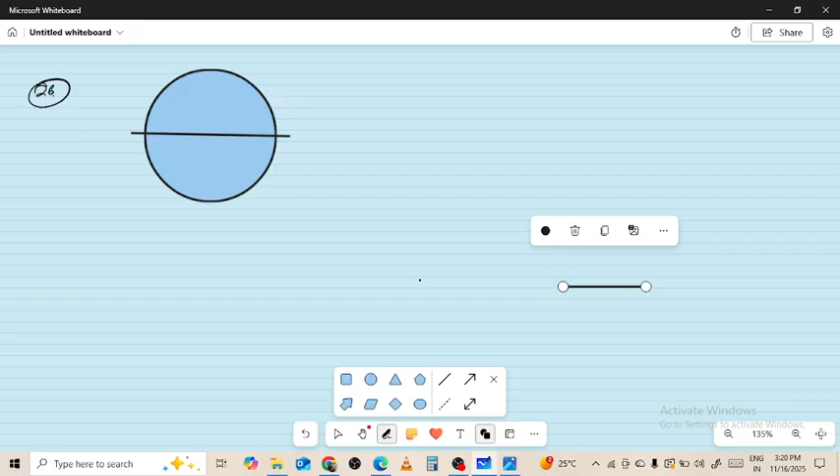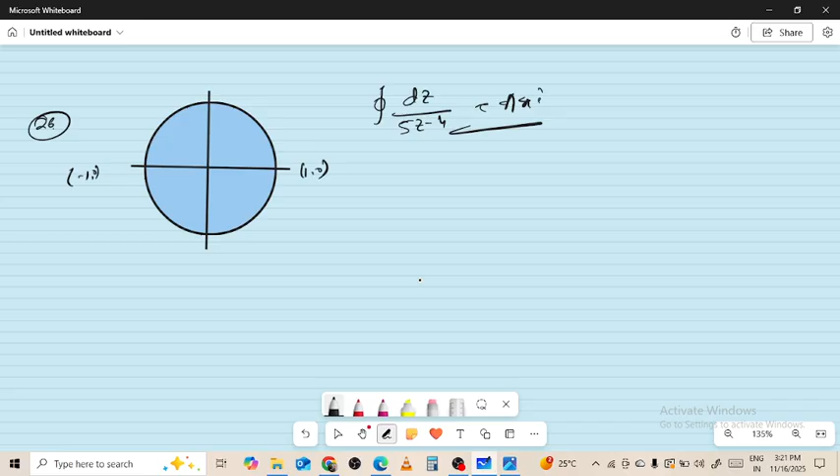Here we would draw the body over here. Now the equation is cyclic integral dz by (5z minus 4) is equal to a times of pi i. The points are minus 1, 0 and 1, 0. Therefore for the y direction, minus 1, 0 and minus 1, 0, 1, 0, 0, 1, sorry.

So we have to proceed: 1 upon 5 cyclic integral over C, 1 upon (z minus 4 upon 5). Therefore the pole is z is equal to 4 upon 5.

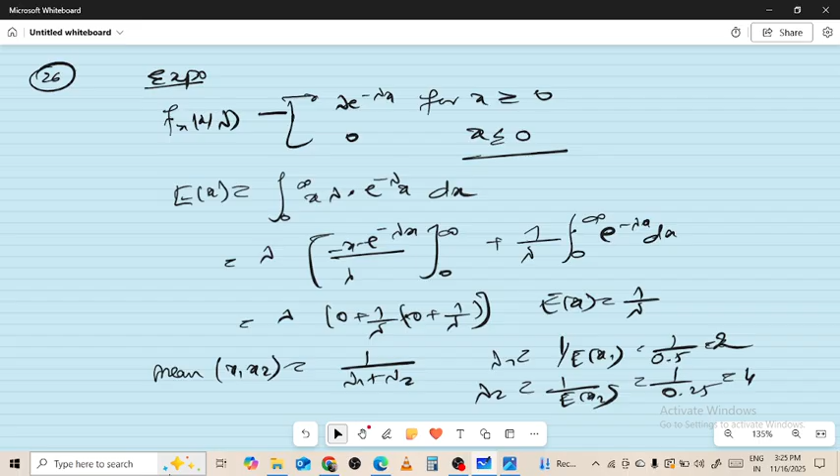Okay, now further, mean of minimum value honi chahiye x1, x2, toh 2 plus 4, 1 upon 0.25 is equal to 4, right. Toh yahan jo aapka justify hoga: exponentially distributed with mean of 1 upon 6.

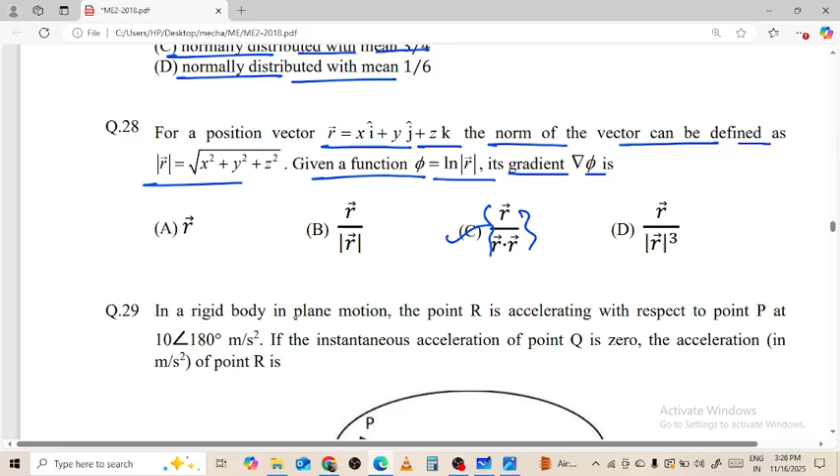Now 29th one. Kya bol raha hai: in a rigid body in a plane motion, point r is accelerating with respect to point p at angle of 180 degree, 10 meter per second square. If the instantaneous acceleration of point q is 0, acceleration in meter per second square for the point r is to be 16, 12, 20 diya hua hai, x, y, z diya hua hai. On that contrary note, how do we have to fetch that gap?

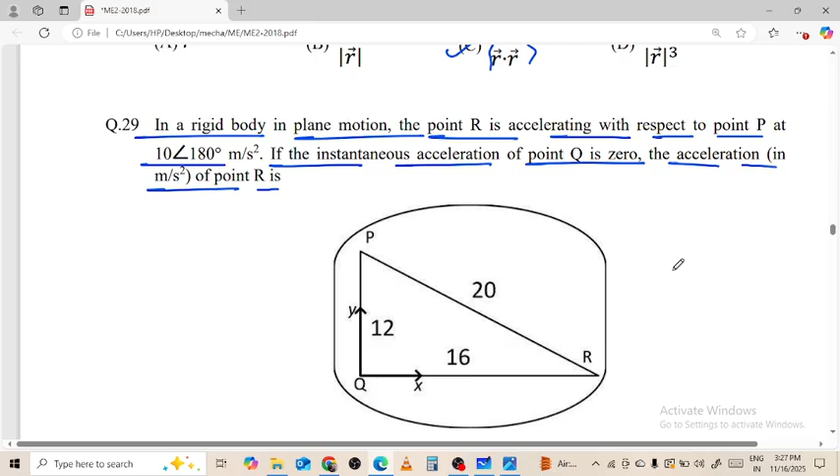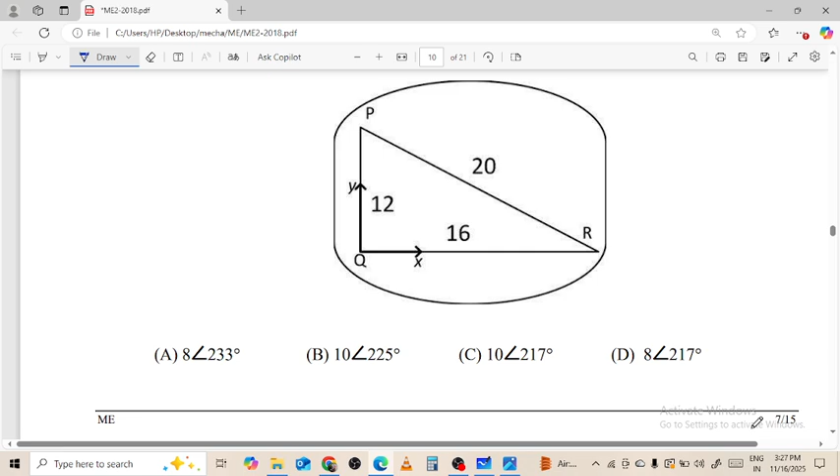Chaliye dekhte hain. So here we have to move around on this node 1. Options are 233, 225, 217, ya ki phir 217 at 8 angle.

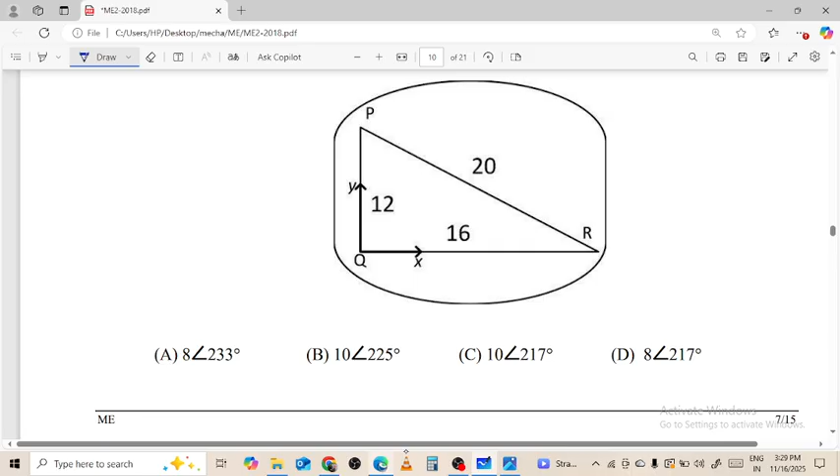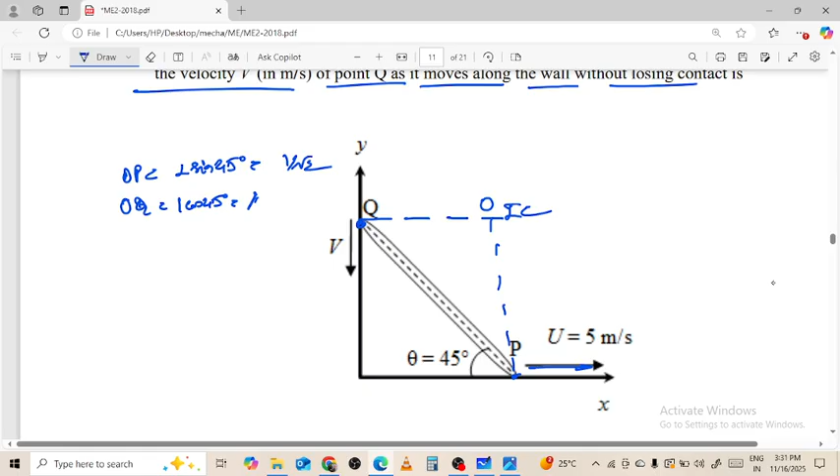1 upon square root of 2, OP times of omega, P into omega. So 5 is equal to 1 upon root 2 times omega value, and OQ is equal to OQ multiplied with omega, 1 upon square root of 2 omega.

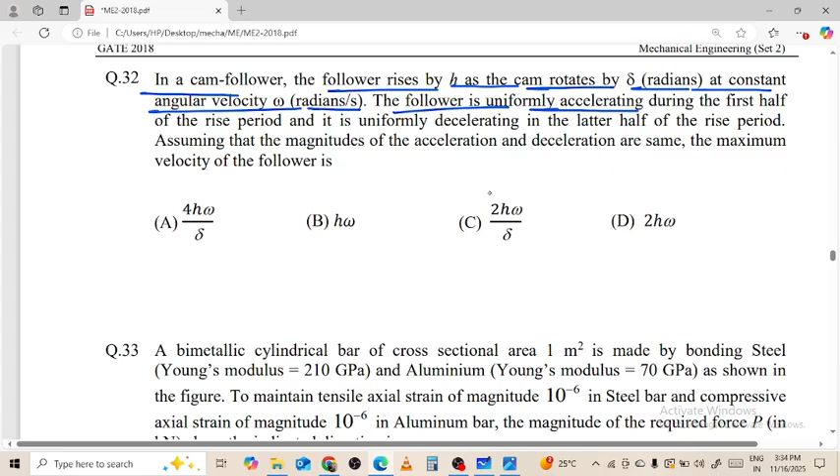Now, next question we have: in a cam and follower, the follower rises by h as the cam rotates by delta radian at constant angular velocity omega radian per second. The follower is uniformly accelerating during the first half of the rise period, and uniformly decelerating in the latter half of the rise period.

Assuming that the magnitudes of the acceleration and deceleration are same, the maximum velocity of the follower options are 4h omega by delta, h omega, 2h omega by delta, and 2h omega.

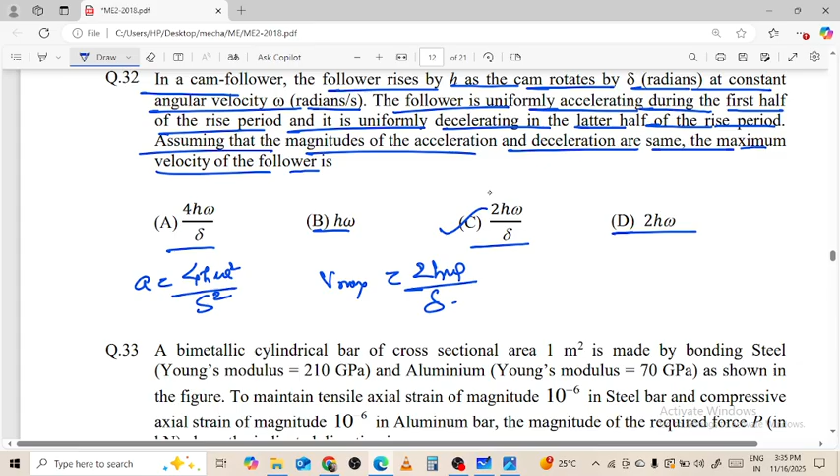Next question. A bimetallic cylindrical bar of cross-sectional area 1 meter square is to be made by bonding steel, Young's modulus 210 gigapascal, and aluminium, Young's modulus 70 gigapascal, as shown in the figure. For a tensile axial strain of magnitude 10 raised to power minus 6 in the steel bar and compressive axial strain of magnitude 10 raised to power minus 6 in the aluminium bar, the magnitude of the required force P in kilonewton along the indicated direction is to be found, with L by 2.

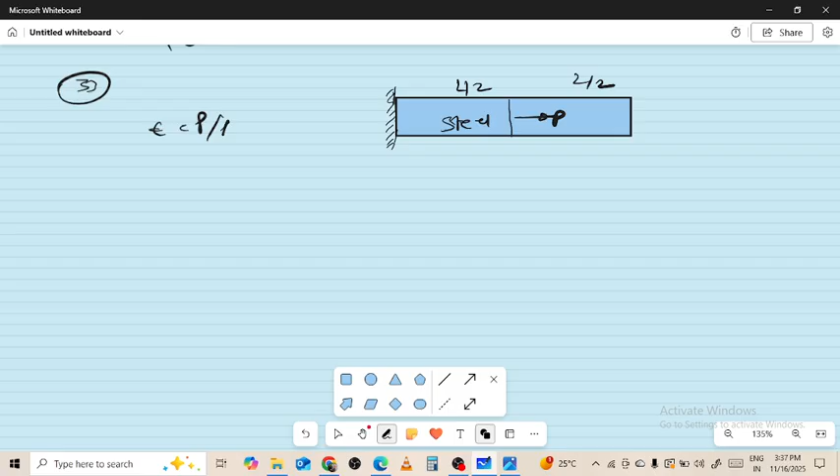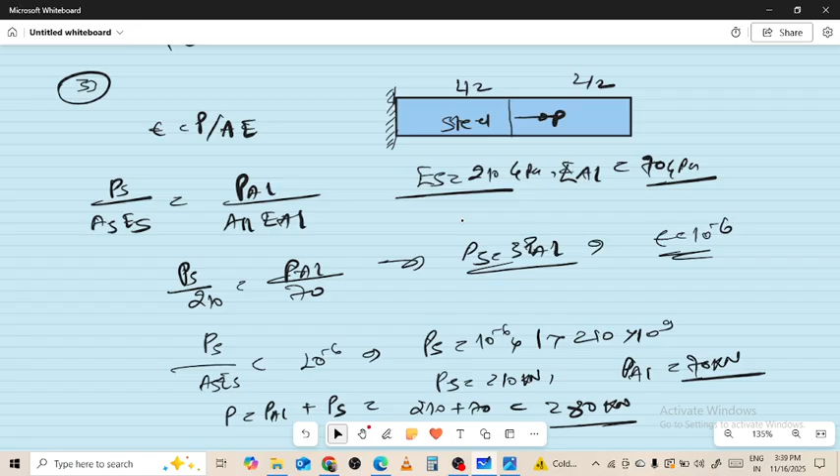Is your right choice for that. Now we have the next question.

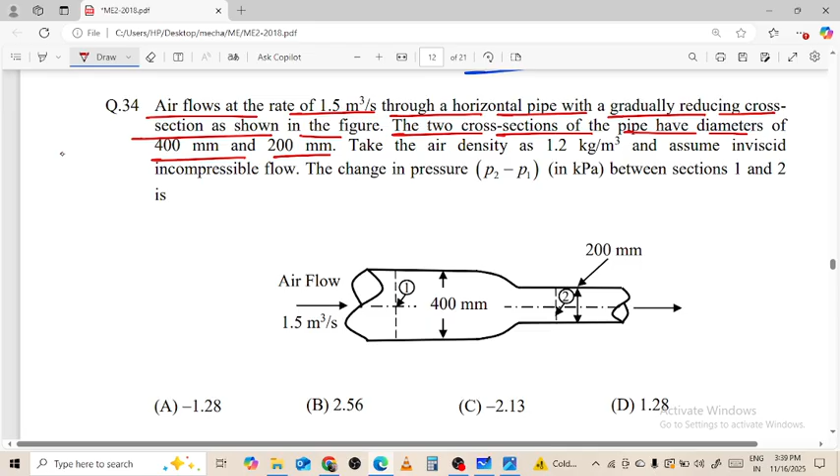Air flows at a rate of 1.5 meter cube per second through a horizontal pipe with gradually reducing cross section as shown in figure. The two cross sections of the pipe have diameters of 400 and 200 millimeter. Take the air density as 1.2 kilogram per meter cube, assuming inviscid incompressible flow. Find the change of pressure P2 minus P1 in kilopascal between section 1 and 2.

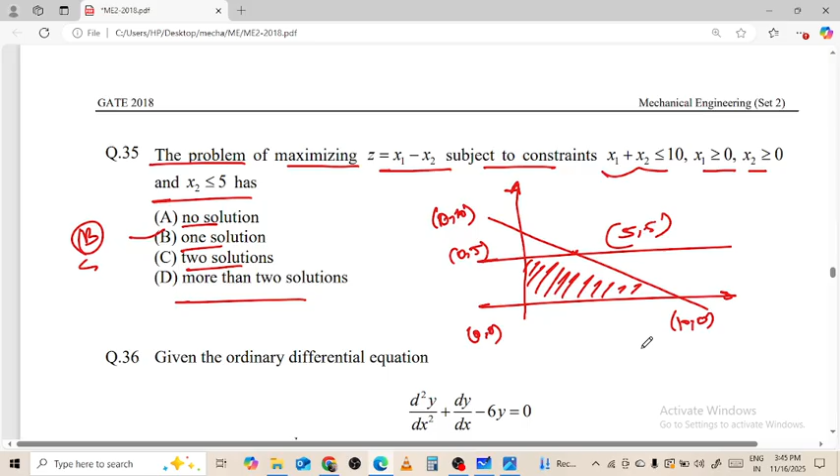Here it is asked, given the ordinary differential equation d square y by dx square plus dy by dx minus 6y equal to 0, with y equal to 0 and dy by dx equal to 1 at x equal to 0. The value of y at 1, correct up to a decimal, is asked.

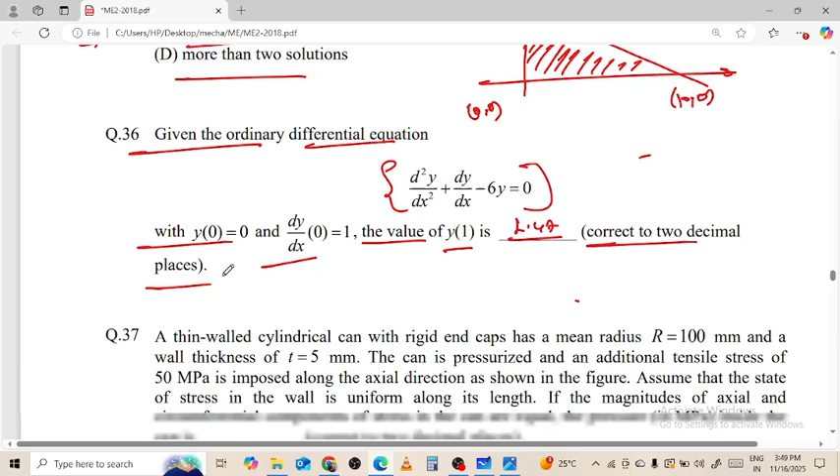A thin walled cylindrical can with rigid end caps has a mean radius of 100 millimeter and a wall thickness of 5 millimeter. The can is pressurized and an additional tensile stress of 50 megapascal is imposed along the axial direction shown in the figure. Assume the state of stress in the wall is uniform along its length. The magnitudes of axial and circumferential components of stress in the can are equal. Find the pressure inside the can, correct up to 2 decimal places.

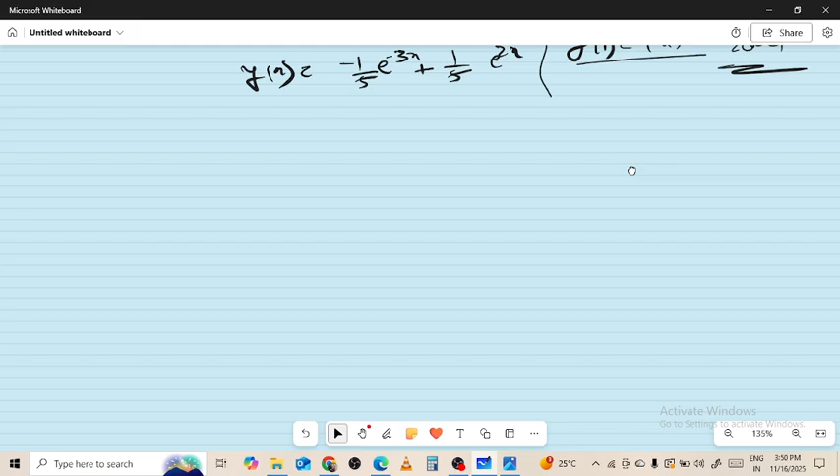In a cylindrical body, hoop stress is PD by 2 times thickness, in terms of radius PR by T, and the longitudinal stress is equal to PD by 4T, equal to PR by 2T.

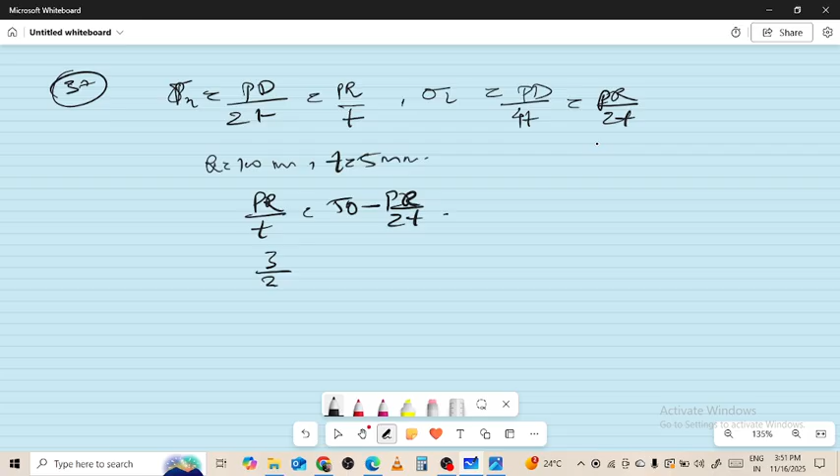Right, we have the radius of 100 millimeter and thickness 5. PR by 2T plus 50 equals PR by T, so PR by 2T value is 50. So the value of pressure, 5 megapascal, is to be achieved. Absolutely correct option.

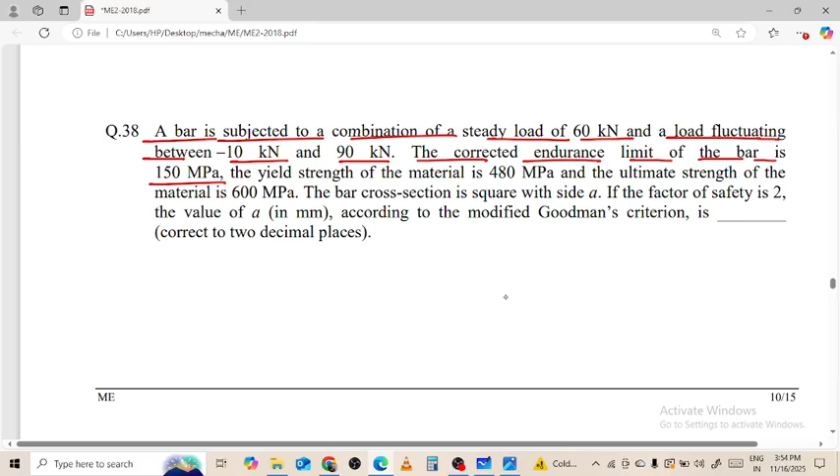Next question: a bar is subjected to a combination of a steady load of 60 kilonewton and a load fluctuating between -10 kilonewton and 90 kilonewton. The corrected endurance limit of the bar is 150 megapascal. Yield strength of the material is 480 megapascal and the ultimate strength is 600 megapascal. The bar cross section is square with side A. Factor of safety is 2. Find the value of A according to the modified Goodman criteria.

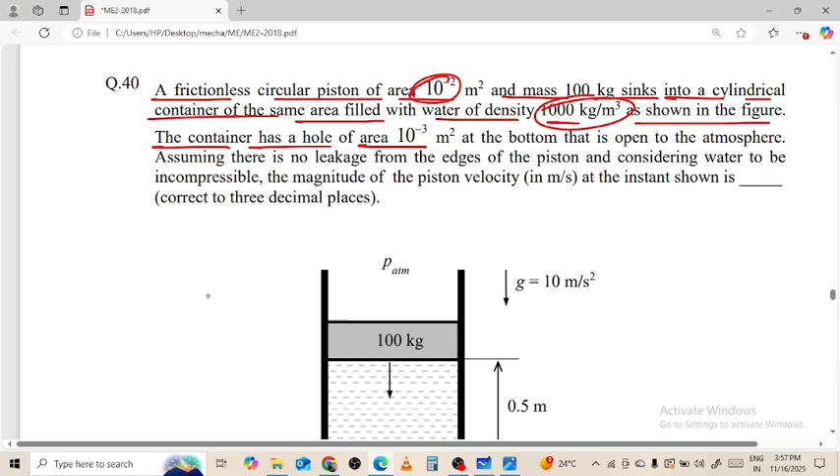Next we come to question 40th: a frictionless circular piston of area 10^-2 meter square and mass 100 kg sinks into a cylindrical container of the same area filled with water of density 1000 kg per meter cube, as shown in the figure. The container has a hole of 10^-3 meter square at the bottom that is open to the atmosphere. Assuming there is no leakage from the edges of the piston and considering water to be incompressible, find the magnitude of piston velocity at the instant shown.

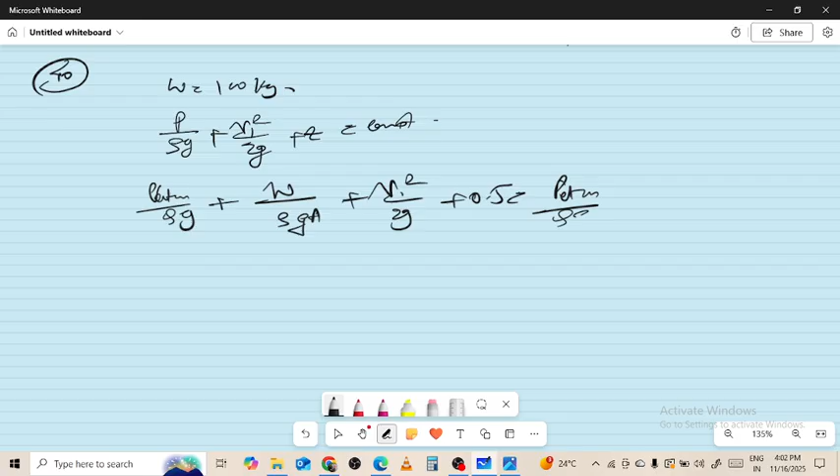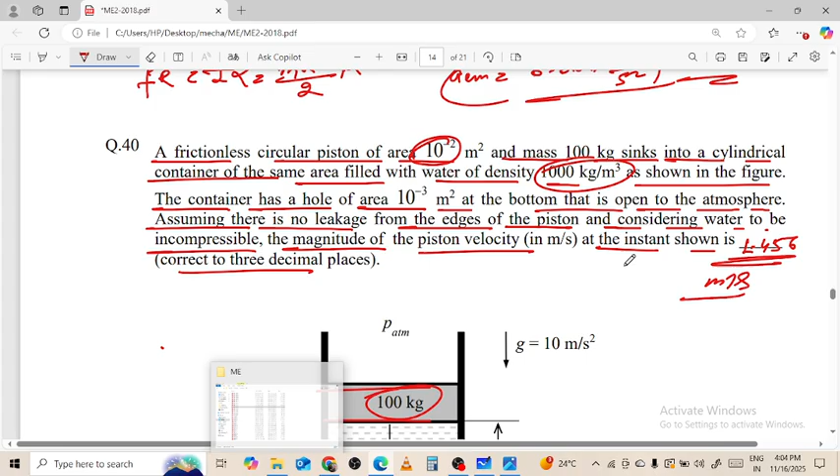So the final value is to be v1 is equal to 1.456 meters per second. That is your final answer. 1.456. Next question we have on the screen here.

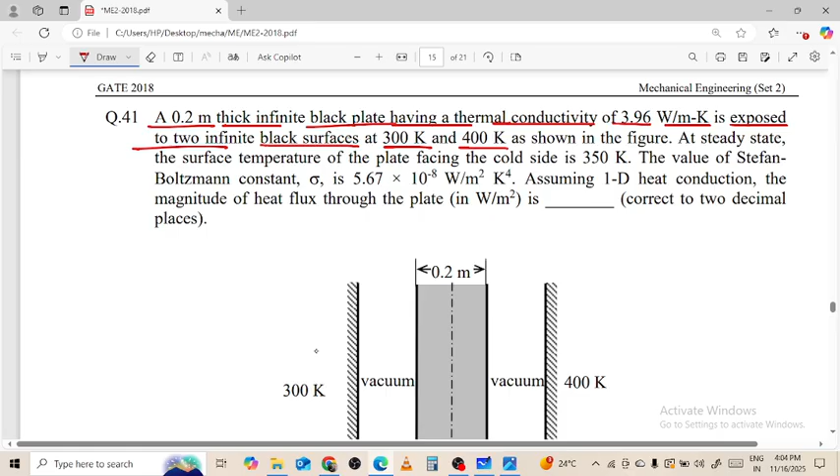A 0.2 meter thick infinite black plate having a thermal conductivity of 3.96 watt per meter Kelvin is exposed to two infinite black surfaces, 300 and 400 Kelvin, shown in the figure. Steady state. Surface temperature of the plate facing the cold side is 350 Kelvin. Value of Stefan Boltzmann constant sigma 5.67 into 10 raised to power minus 8 watt per meter square Kelvin to the power 4. Assuming one-dimensional heat conduction, the magnitude of heat flux through the plate in watt per meter square.

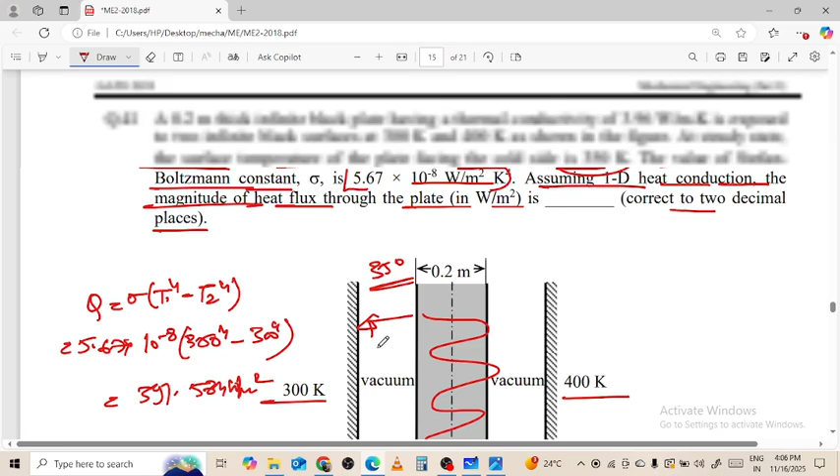So the magnitude, 391.58, final answer.

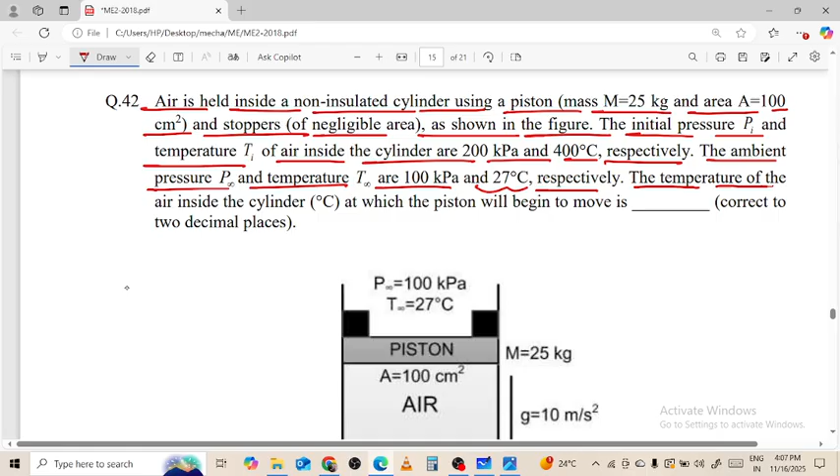Next question. Air is held inside a non-insulated cylinder using a piston. Mass 25 kg. Area 100 centimeter square. Stopper of negligible area shown in the figure. Initial pressure Pi, temperature Ti of air inside the cylinder are 200 kilopascal and 400 degrees Celsius respectively. Ambient pressure P infinity and temperature T infinity are 100 kilopascal and 27 degrees Celsius respectively. Temperature of air inside the cylinder in degrees Celsius at which piston will begin to move. Correct up to 2 decimal.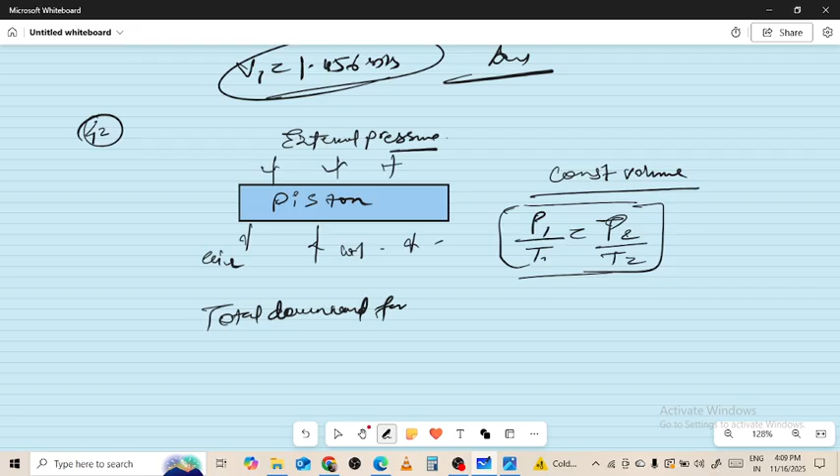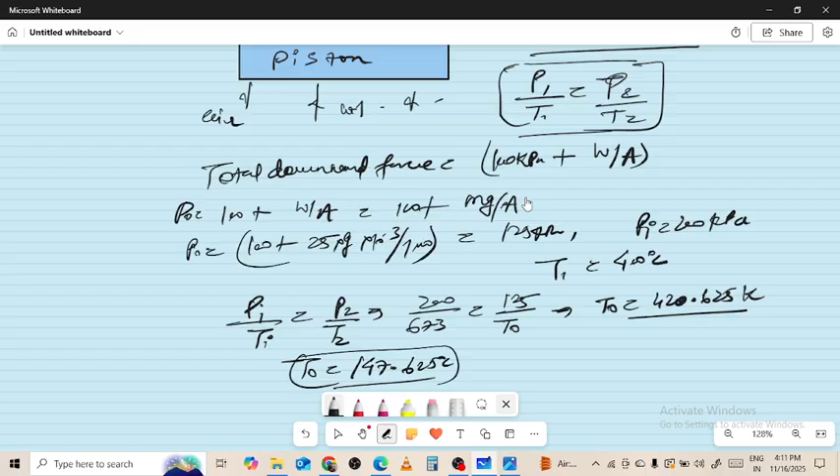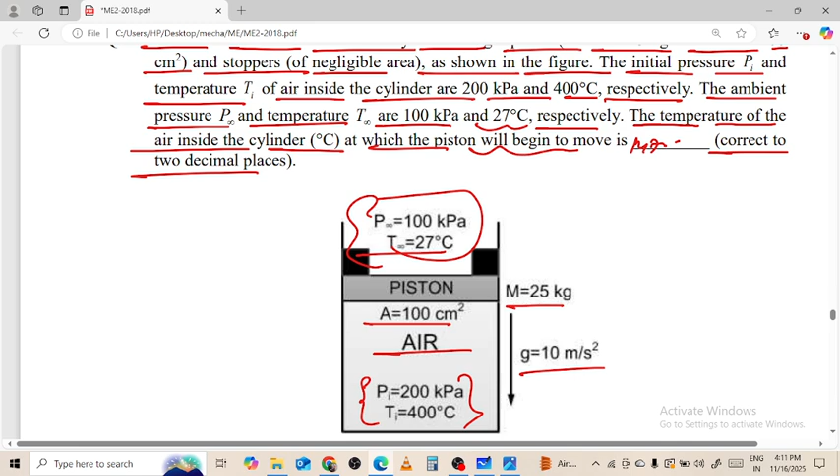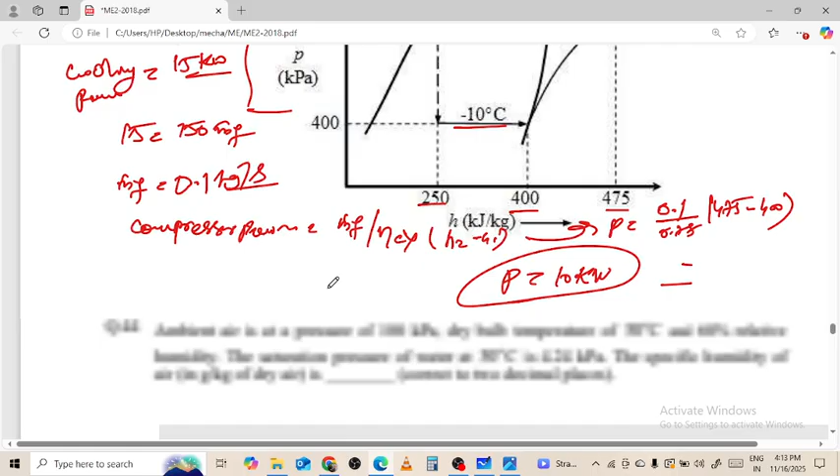Now 44th: ambient air is at pressure 100 kilopascal, DBT 30 degrees, 60% relative humidity, saturation pressure of water at 30 degrees Celsius.

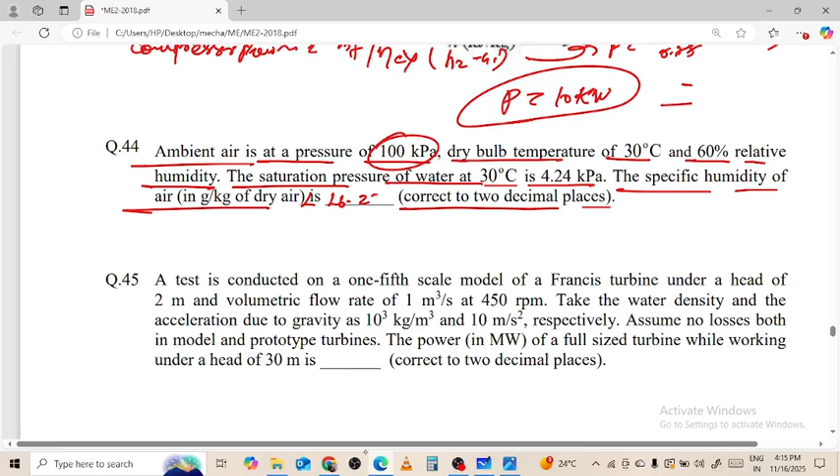Here the question number 45. A test is conducted on a 1/5 scale model of a turbine under a head of 2 meter, volumetric flow rate 1 meter cube per second at 450 rpm. Take the water density and the acceleration due to gravity as 1000 kg per meter cube and 10 meter per second square respectively. No losses both in model and prototype turbine. Power of full size turbine while working under a head of 30 meter, to 2 decimal places,

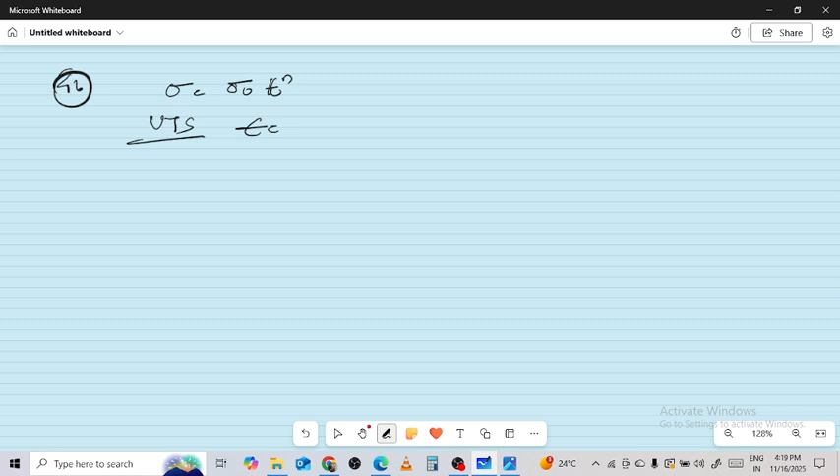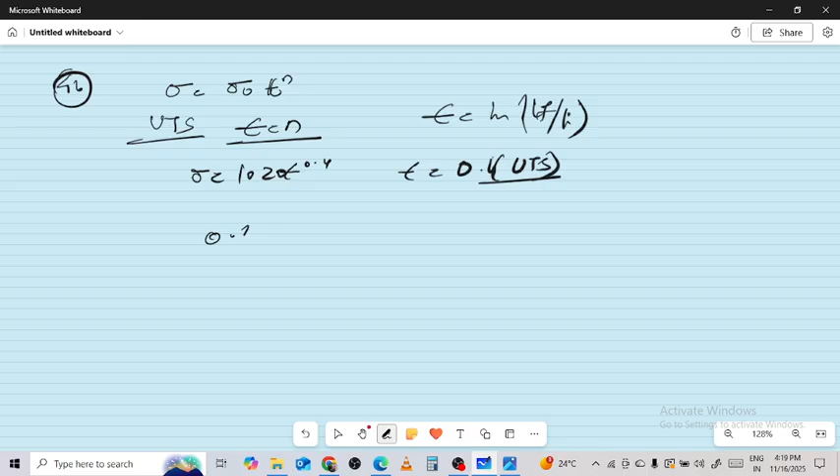Epsilon power n, the UTS. Epsilon is n, epsilon is log of final length to the initial length. Final value is 1.491 and the volume remains constant.

So the volume initially is equal to final. So the AF value is equal to 100 into Li by Lf. Here the AF value is equal to 100 by 1.491. So the AF is 67.05.

Next, 47: a steel wire is drawn from an initial diameter of 10 millimeter to a final diameter of 7.5 millimeter, half cone angle of the die, coefficient of friction between die and the wire 0.1, average of initial and final yield stress 350 megapascal, equation of drawing stress sigma given as Y average, 1 plus mu cot alpha, 1 minus Df by Di to the power 2 mu cot alpha. Drawing stress required to carry out the operation in decimal places is to be asked.

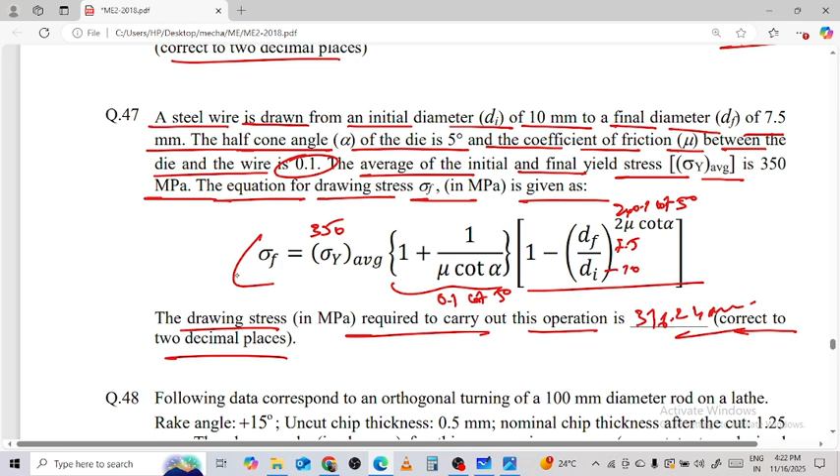Next question 48: following data correspond to an orthogonal turning of 100 millimeter diameter rod on lathe, rake angle 15 degree, uncut chip thickness 0.5 millimeter, nominal chip thickness after the cut 1.25 mm. Shear angle for this process in decimal places is to be asked.

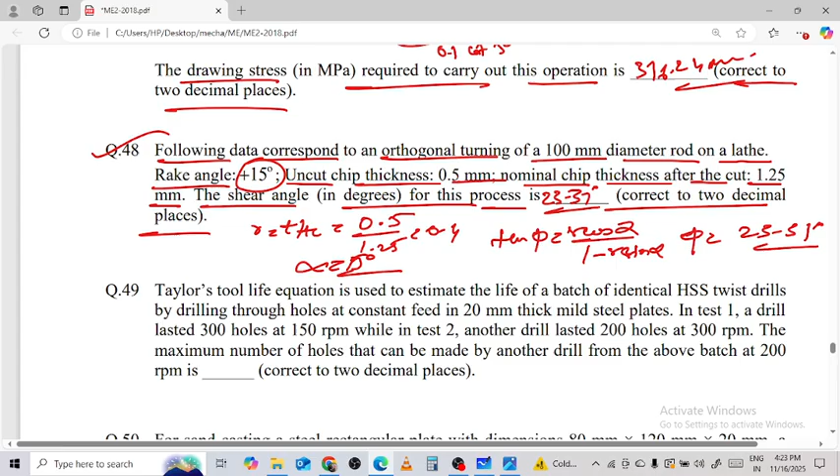Next, 49th number: Taylor's tool life equation is used to estimate the life of a batch of identical high speed steel twist drills by drilling through holes at constant feed in a 20 millimeter thick mild steel plate. In test 1 a drill lasted 300 holes at 150 rpm while in test 2 another drill lasted 200 at 300 rpm. Maximum number of holes that can be made by another drill from the above batch is

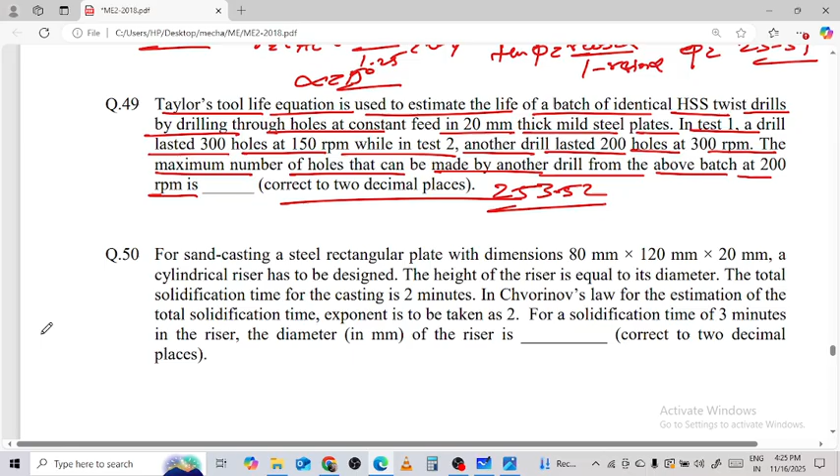For a sand casting of a steel rectangular plate of dimension 80 into 120 into 20 millimeter, a cylindrical riser has to be designed. Height of the riser is equal to its diameter. Total solidification time for the casting is 2 minutes. In Chvorinov's law of estimation of the total solidification time, exponent is to be taken as 2. Solidification time is 3 minutes in the riser. Diameter of the riser to 2 decimal places.

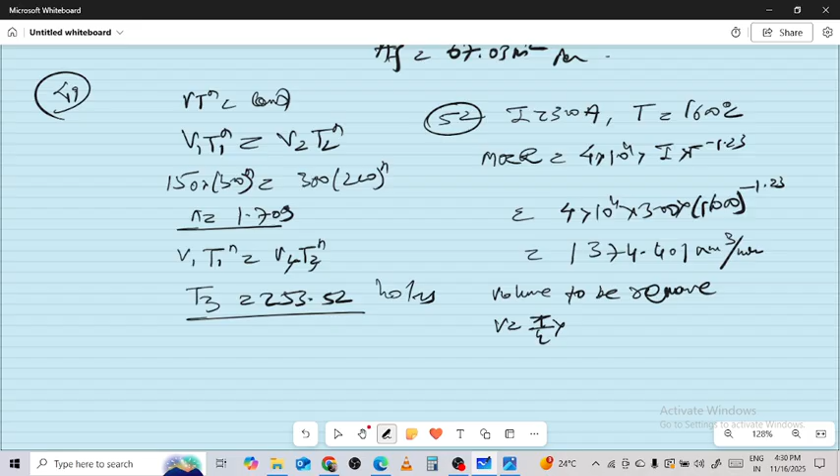So here we have I and 1600 power minus 1.23, so the value is 1374.401 millimeter cube per minute. Now the volume to be removed is equal to pi by 4 d square h, so the value pi by 4 25 square 20, so the value is 9817.47 millimeter cube. So the time taken is equal to volume to be removed

by material removal rate. The T value is equal to 9817.47 upon 1374.401, 7.14.

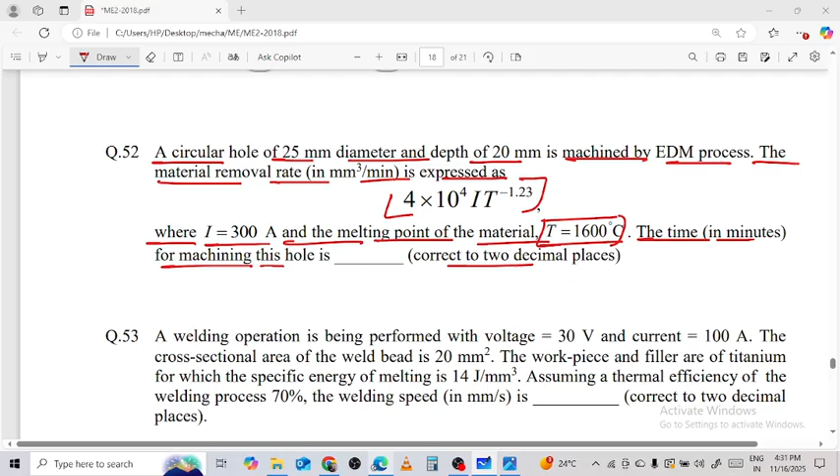Next question 53rd. A welding operation is being performed with voltage 30 volt and current 100 ampere. The cross-sectional area of the weld bead is 20 millimeter square. Workpiece and filler are titanium for which the specific energy of melting is 14 joule per millimeter cube. Assuming the thermal efficiency of the welding process is 70%, welding speed in millimeter per second, up to 2 decimal places.

So power is equal to consumption of the power is 0.7 into 3000 watt, whose value is equal to specific energy, area and welding speed, 14 into 20 into V. Welding speed is equal to 7.5 millimeter per second. This was easy, right?

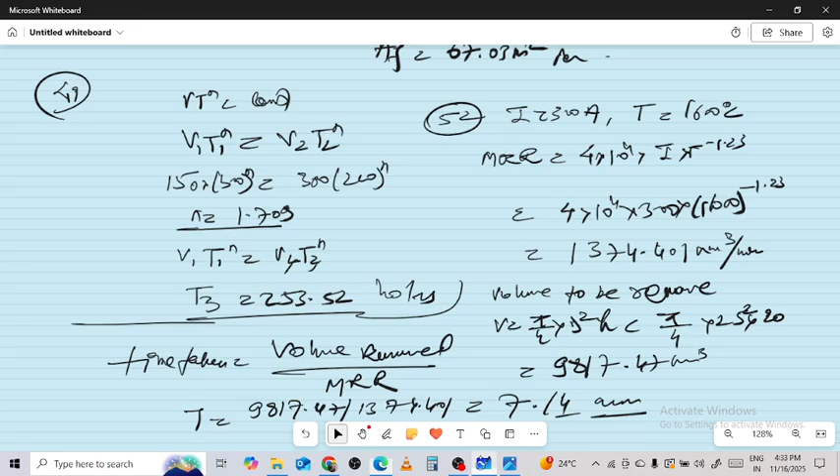Now here the second last question of the day, 54. Steam in the condenser of a thermal power plant is to be condensed at a temperature of 30 degrees Celsius. Cooling water enters the tube of condenser at 14 degrees Celsius and exits at 22 degrees Celsius. Total surface area of the tube is 50 meter square. The overall heat transfer coefficient is 1000 watt per meter square kelvin. Heat transfer in the condenser, up to decimal places. Let's see how to do it.

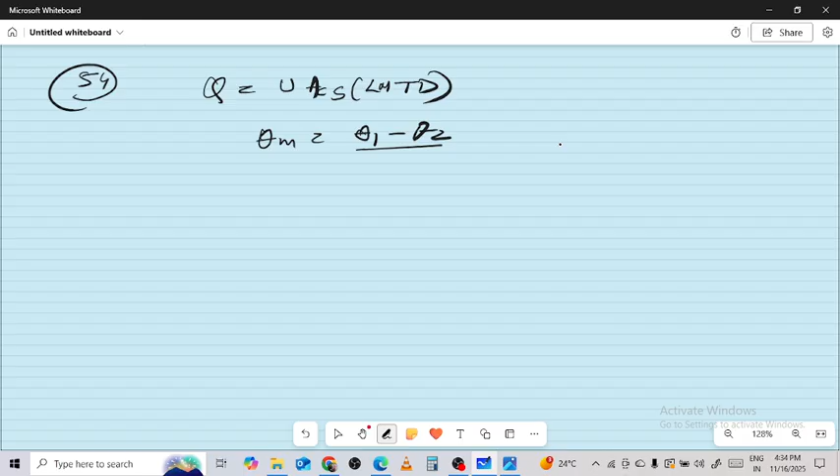LMTD value of theta m: theta 1 minus theta 2 over logarithmic of theta 1 by theta 2. So the value of theta 1 is 16 degree and the theta 2 value is 8 degree. So it becomes 8 on log of 2, whose value is 11.54, and value of heat Q is equal to 1000 into 50 into 11.54, so the value is about 0.577 megawatt.

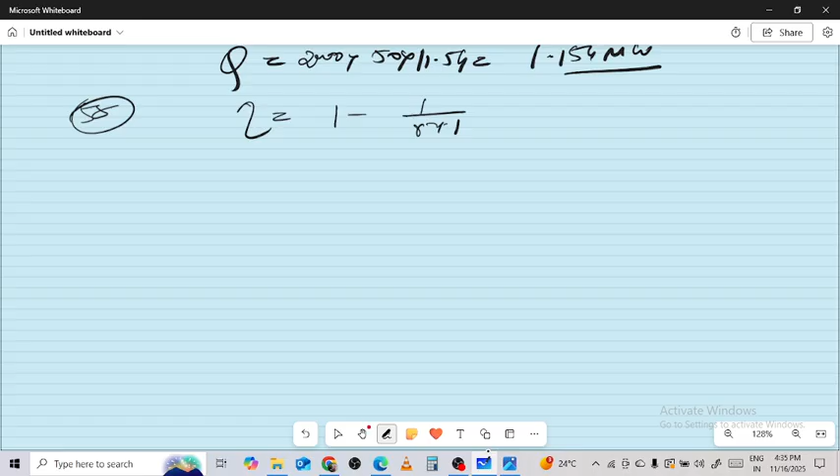Next, 55. Vehicle powered by a spark ignition engine follows a standard Otto cycle, gamma 1.4. The engine generates 70 kilowatt while consuming 10.3 kilogram per hour of fuel, calorific value 44,000 kilojoule per kilogram. Compression ratio, the value of r for the Otto cycle. Let's see how we'll calculate. Here we have the formula of efficiency of the Otto cycle: 1 minus 1 by r raised to power of gamma minus 1.

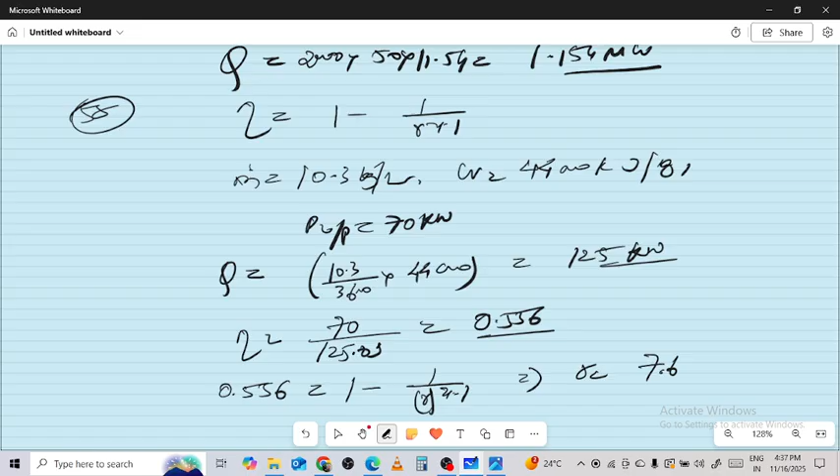Here mass flow rate is given as 10.3 kilogram per hour, calorific value 44,000 kilojoule per kilogram, power output given is 70 kilowatt. Heat is equal to 10.3 on 3600 into 44,000, whose value becomes 125.9 kilowatt. Now efficiency is equal to 70 upon 125.9, value is 0.556. 1 minus 1 by r raised to power of gamma minus 1, whose final value comes 7.61. Right, 7.61, that is your final answer.